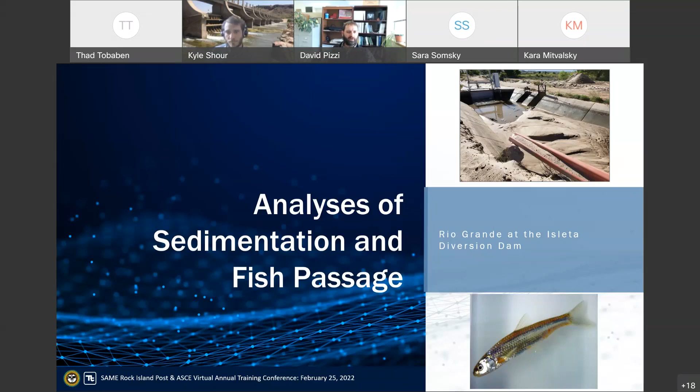My name is David Pizzi. I'm in my 19th year with Tetra Tech, working as a hydraulic engineer. I've been working for the Pueblo of Isleta on the Isleta Diversion Dam, or IDD, settlement for the past 4.5 years, primarily working on solutions to the sedimentation issues and supporting the fish passage solution.

Because of a last-minute meeting with tribal leadership, Derek is unable to join us this afternoon. He was excited to share with you all the project background. In his role as the Water Resources Department Manager for the Pueblo, he is the Pueblo's liaison with the settlement parties, and he is the Pueblo's project manager.

To save you all from having to listen only to me for this whole presentation, my coworker Kyle will be divvying up the topics to share with you. Kyle has been working on sediment transport issues with the Pueblo of Isleta since 2012, most recently with Derek on the sedimentation and fish passage issues at the IDD.

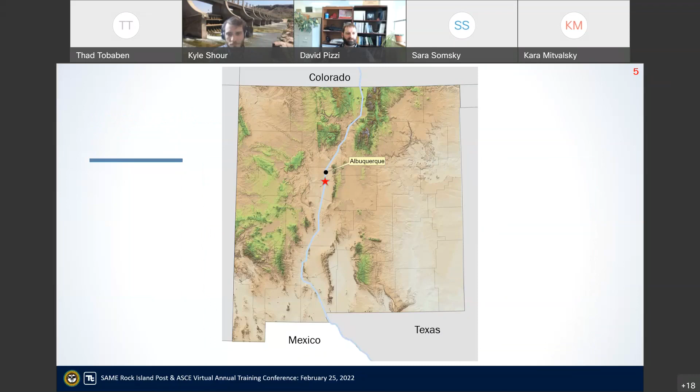In 1923, the New Mexico legislature provided the legal framework for the organization of the Middle Rio Grande Conservancy District. A component of the district's mission is to operate, maintain, and manage irrigation in the Middle Rio Grande Valley in cooperation with other local, state, and federal agencies. So in support of this mission, by 1935, the district had constructed the Isleta Diversion Dam to supply irrigation water to farmlands on both sides of the valley.

Whereas the dam site was originally a constriction that naturally limited potential for sedimentation because flood flows accelerated through the constriction, river narrowing has turned the site into a relative expansion that exacerbates sedimentation.

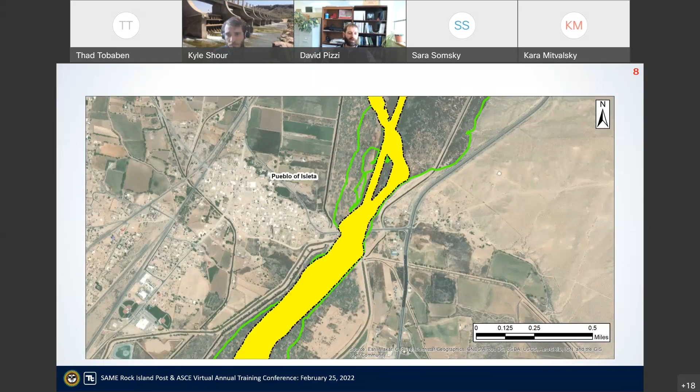The yellow polygon here is the 1962 channel, representing the geomorphic change that occurred over about the first 30 years, the river narrowing after the diversion dam was constructed.

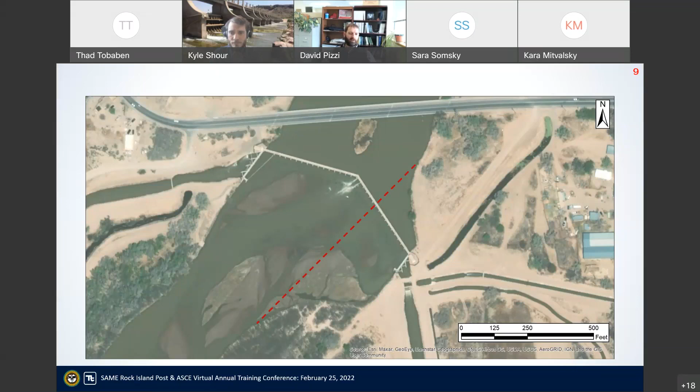It's also notable that the Isleta Diversion Dam diverts flow through sluiceways into irrigation infrastructure on both sides of the Rio Grande. We preliminarily estimated that the cost of a project to narrow the river through the dam site, to better maintain sediment transport continuity, was going to be well in excess of the available funding, largely because of the effort that would be required to relocate a sluiceway and a canal heading.

For some historical perspective, there were disastrous back-to-back floods in 1941 and 1942 that nearly bankrupted the district because of the extensive maintenance backlog from the flooding. So in the Flood Control Act of 1948, Congress authorized the Middle Rio Grande Comprehensive Plan, which transferred ownership of the dam to Reclamation, with the district maintaining responsibilities for operation and maintenance. And the act assigned Reclamation responsibility for rehabilitating the damaged dam.

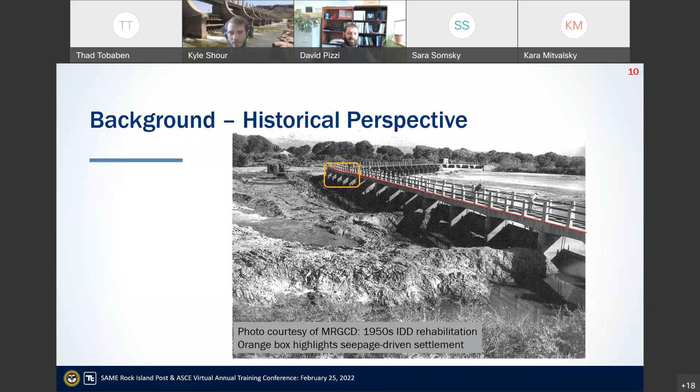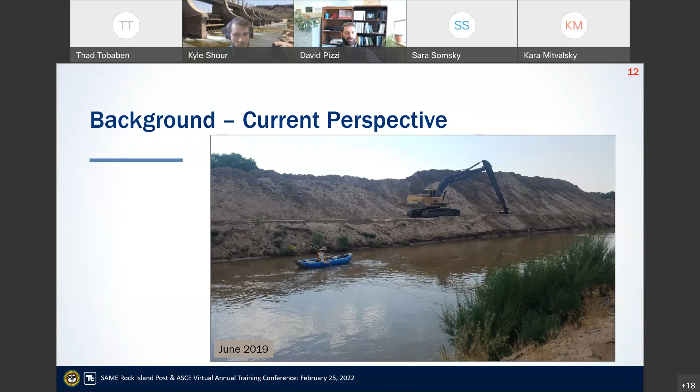So if we come forward to today, or near today, this picture from the summer of 2019 shows extensive dredge spoils along the head of the Peralta Main Canal. They're put there to dewater, and these dredge spoils just confirm that, even today, sedimentation remains a huge operational challenge for the Conservancy District.

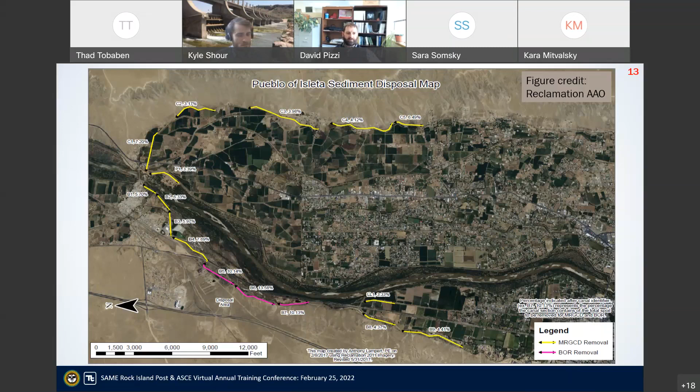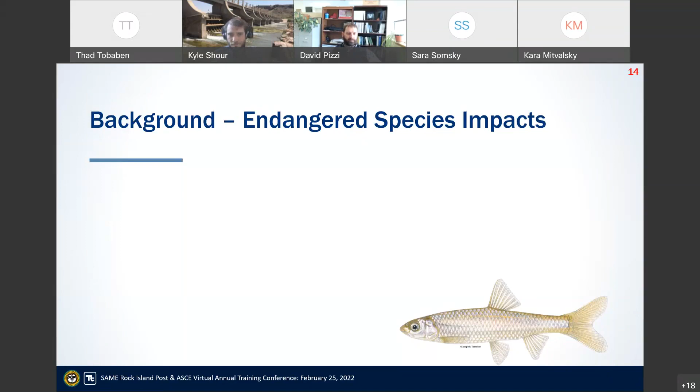In addition to the sedimentation impacts, the operation of the diversion dam has impacted endangered species. In 1994, the Rio Grande silvery minnow was federally listed as endangered under the ESA, in part because diversion dams, such as the Isleta Diversion Dam, fragment their habitat and prevent migration during the summer low flows and river drying.

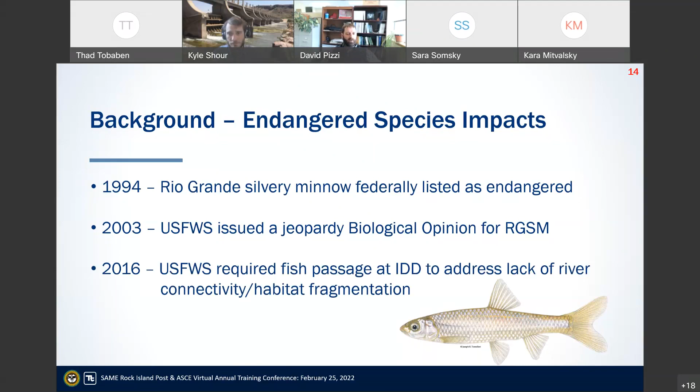So in 2003, the U.S. Fish and Wildlife Service issued a jeopardy biop on the effects of the actions associated with Reclamation's and the district's water operations and river maintenance and the Corps' flood control operations. And it was the 2016 biological opinion where the Fish and Wildlife Service required fish passage be implemented at the diversion dam.

So with this background understanding of the history of the sedimentation and fish passage issues at the Isleta Diversion Dam, how was a settlement agreement reached? Well, the Pueblo contended that it had valid claims against the U.S. and the district in connection with the construction and operation of the Isleta Diversion Dam and the associated irrigation and drainage facilities. Reclamation and the district disputed the validity and the amounts of these claims.

Fortunately, all the parties wished to avoid litigation, so they entered into an agreement of compromise and settlement. And the parties, the Pueblo of Isleta, Reclamation, the Middle Rio Grande Conservancy District, and the Bureau of Indian Affairs, executed the agreement in October of 2016.

Components of the agreement that bear on this presentation include infrastructure improvements, such as projects and activities to minimize the operational problems at the diversion dam associated with sedimentation, improving fish passage at the diversion dam, and restoring bosque, which is just the Spanish word for forested riparian floodplain, the bosque and riverine habitats along the Pueblo of Isleta reach of the Middle Rio Grande.

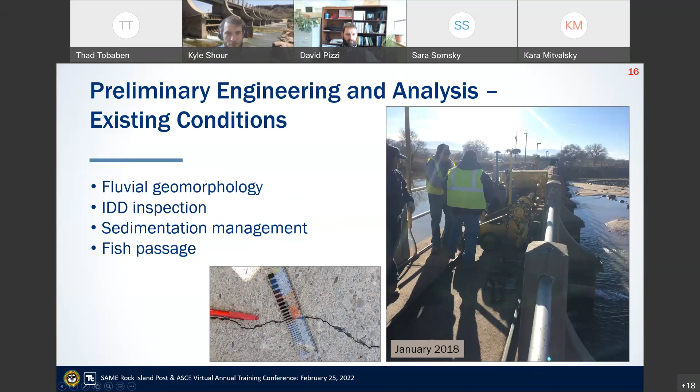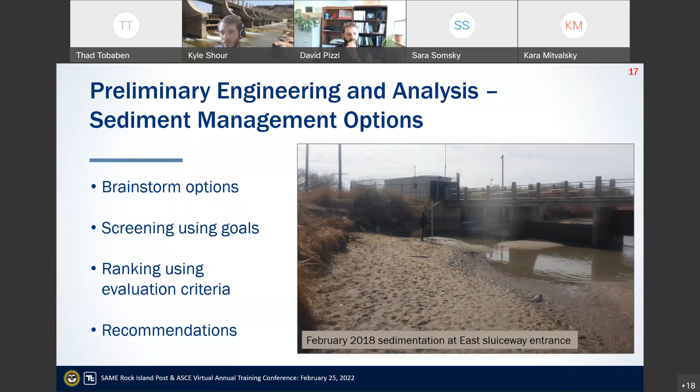Once we had a decent grip on existing conditions to understand the nature of the problems and the capacity of the dam's structural integrity to accommodate different infrastructure improvements, our focus shifted to developing and screening conceptual level options for improving sedimentation management. Working with the technical team, we brainstormed 35 sediment management options, and this is a pretty thorough process. Then we screened the options to remove ones that didn't satisfy all of the goals of the settlement. Remaining options were ranked based on evaluation criteria considering environmental impact, complexity, costs, adaptability, and relative magnitude of sedimentation reduction. We identified knowledge gaps during this process, which were used to make recommendations about additional data collection and modeling so the technical team could select a preferred option from the top ranked options.

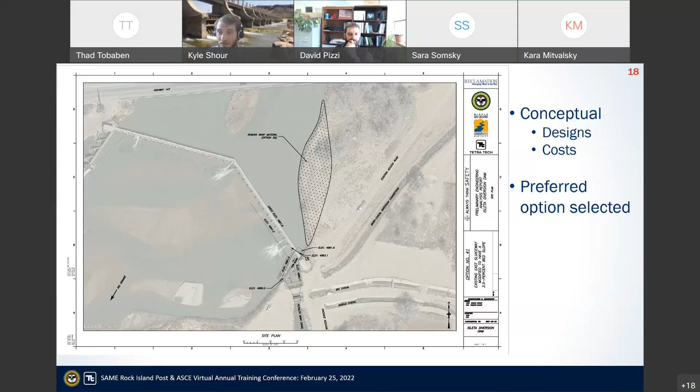We focused on evaluating options that targeted reducing the sedimentation problem on the east side, because that's where the sedimentation was more problematic and impacted reliable delivery of irrigation water. The process included development of conceptual design plans and accompanying cost estimates to help rank the options. Not to give any spoilers, but this ultimately came to the top as the preferred alternative. It involves excavating this bank line and making a sloped bed in this sluiceway. We were really excited that the process proved this option was relatively simple and, as I'll show you, very effective.

Because the 2016 biological opinion required fish passage for the silvery minnow, we also looked into options for providing fish passage. The interesting thing is it's a bit of a unique situation in that there aren't a lot of studies discussing how to pass small-bodied fish. The minnow is 2-3 inches long on average. So like we did with sedimentation management, we worked with the technical team to brainstorm 13 different fish passage options that were screened based on settlement goals and then ranked based on evaluation criteria.

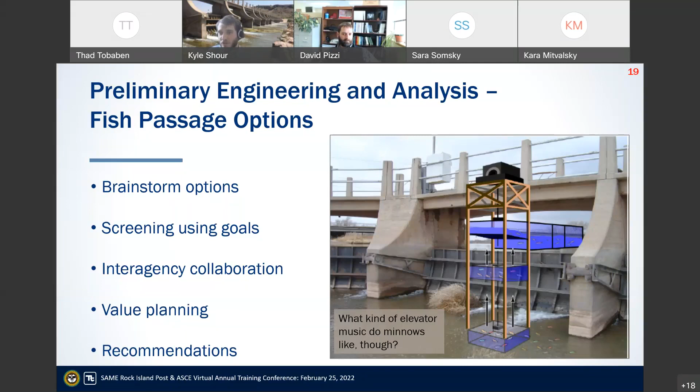In March of 2020, Reclamation led a value planning study of some of the top options, and we found that many of those top options remained tightly clustered in scoring, indicating that other factors, such as the Pueblo's preference to minimize cultural and traditional impacts near the dam, would drive the selection. So we recommended further consultation with the Pueblo.

Ultimately, 2 fish passage options rose to the top. Both fishways go through an existing gate bay in the middle of the dam. One is placed largely upstream and one is placed largely downstream. The downstream fish passage option was quite a bit less expensive to construct because you're not trying to protect a concrete apron that went in as part of the 1950s rehabilitation to prevent piping underneath the dam. However, there is an important cultural site that is regularly used by the Pueblo downstream of the dam, and so there was a lot of concern about whether that would impact their use of the site.

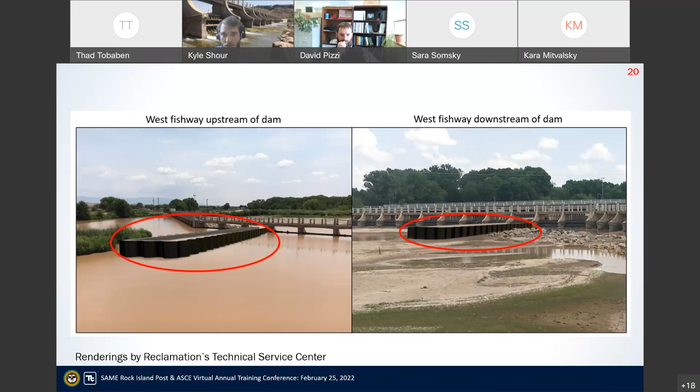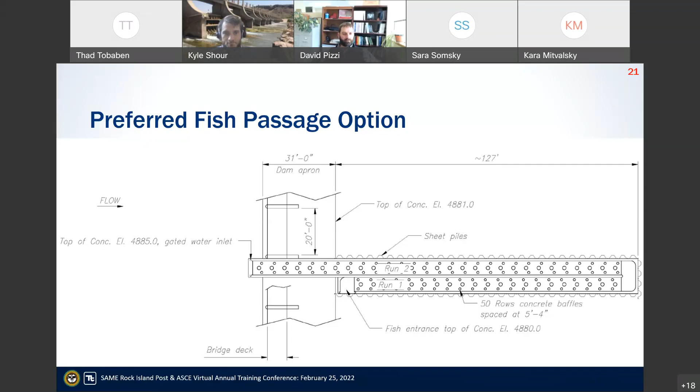We evaluated existing environmental permitting authorities that might apply for the implementation of sedimentation and fish passage improvements, particularly considering anticipated environmental compliance needs such as NEPA, ESA, Clean Water Act, and cultural compliance. We also compiled compliance documents from the Pueblo completed in the last 15 years to provide background information that may be used as reference for environmental compliance required for construction of the preferred options. We completed these tasks in close coordination with the technical team.

One of the important findings of the preliminary engineering and analyses was that sediment management options could not be effectively ranked because of a lack of understanding of sediment transport processes near the Isleta Diversion Dam.

We recommended additional research by asking the following four questions. First, why is sedimentation on the east side canals more problematic than the west side canals, despite the fact that they divert comparable flows?

Second, whether sediment diverted into the irrigation canals enters the sluiceway from near the bottom of the sluiceway or higher in the sluiceway water column. Some options are better suited to remove bed load, which stays near the bottom of the water column, while others are better suited to remove the suspended load that can move much higher in the water column. The answer to this question was instrumental in selecting a preferred option.

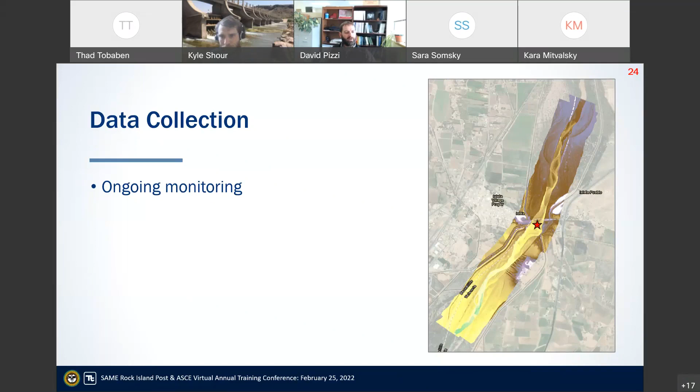So since 2015, just like Kyle was saying, we have been monitoring a channel restoration project immediately downstream of the dam. And the monitoring includes cross-section surveys, vegetation inventory, and listed species surveys.

So in 2017, for the Bureau's Albuquerque Area Office, we surveyed the bathymetry using RTK GPS and the floodplain topography using LiDAR for a mile upstream and downstream of the dam. The resulting surface is shown here at right.

And the preliminary engineering recognized the value in building on these previous monitoring efforts to focus on future measurements of hydraulics and sediment transport into the sluiceways.

So the district started recording gate operations and gate settings for the main stem dam radial gates, the sluiceway gates, and the canal headworks during the 2019 irrigation season.

And the spring runoff for 2019 was projected to have a high peak flow and a sustained duration, two conditions that are ideal for mobilizing and transporting sediment. So the technical team agreed to prioritize that opportunity to measure hydraulics and sediment transport.

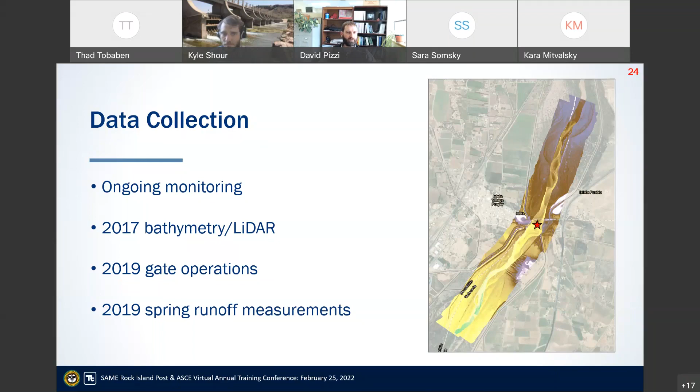And we were able to leverage a relationship with the USGS's New Mexico Water Science Center to accurately and economically complete all of the laboratory analyses of sediment masses, concentrations, and gradations.

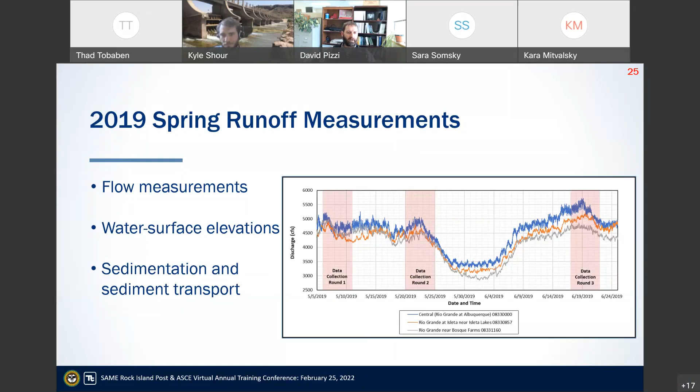So this figure shows the 14 agreed upon locations where we collected hydrographic measurements during the 2019 spring runoff. You can see that there's a location upstream, a couple locations upstream of the dam on the river, one downstream. There's the inlet and outlet of each of the two sluiceways, and then measurement locations in the canals heading at the dam.

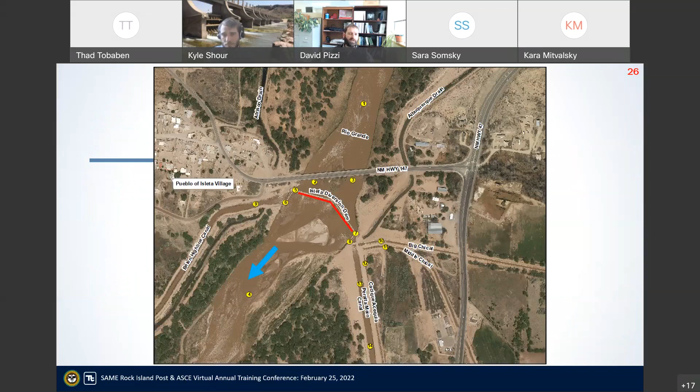So we used our acoustic Doppler current profiler, ADCP, mounted in a kayak to measure flow in the Peralta main canal. And we also mounted it in a trimaran so that we could measure flow in the sluiceways.

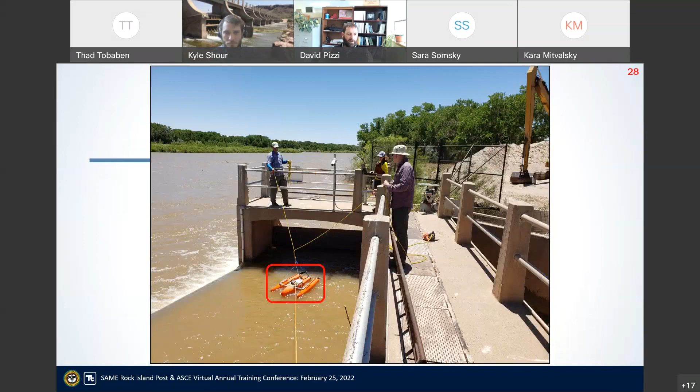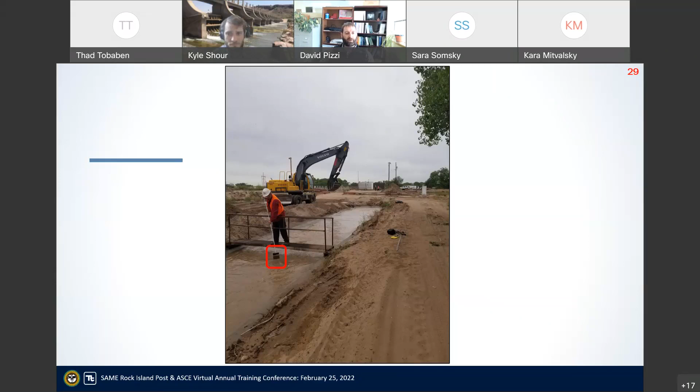These were places where we didn't have good information on flow rates. We also collected bed material samples from the canals and from the river. Here you can see there was active dredging that we were working around, so we had to coordinate closely with the irrigation district to ensure the safety of our personnel and theirs.

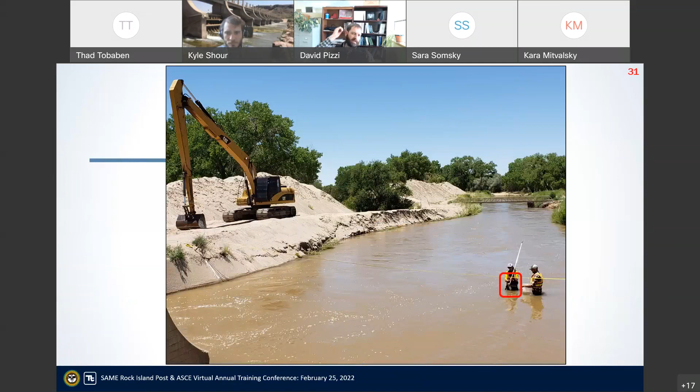We wound up collecting quite an extensive set, or 3 sets, of measurements. It was the interpretation of these measurements that really crystallized for us a eureka moment in understanding why the east side sedimentation issues have been historically so much more problematic than on the west side. It's largely the turbulence in the east sluiceway.

It's that understanding we gained from this effort that really guided the development of the structural modifications we were considering for the East Sluiceway. These modifications were evaluated using a physical model. I will share with you our involvement in the testing and analyses with that model, but I'm going to turn it over to Kyle next to talk a little bit about some of the numerical modeling we completed.

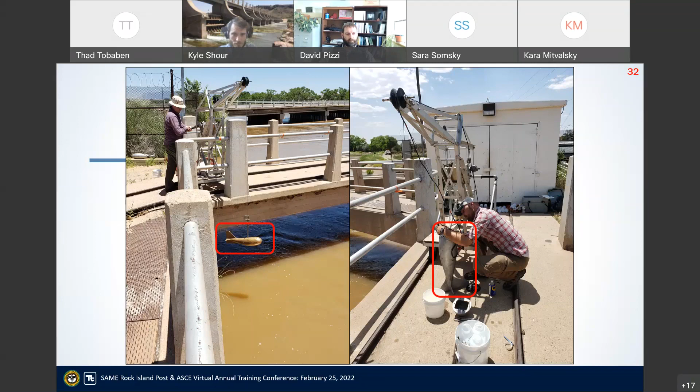So we completed 2 types of numerical modeling for this study. Both were sediment transport analyses - one was a 1D model, and the other was a 2D model. The 1D modeling was used to estimate the supply of sediment to the Isleta Diversion Dam from further upriver. The 2D modeling was used to assess the impacts of a range of different gate operational scenarios on sediment diverted into the sluiceways.

The 1D mobile bed model was previously developed using HEC-RAS for the Albuquerque district. We completed this model in 2008 after a period of collaboration and beta testing with Stanford Gibson at HEC. The 2D model was developed for this project specifically using SRH2D. This afforded us a good opportunity to work with SRH2D developer Yong Lai, who sits at the Denver Technical Service Center, which is represented on the technical team.

Yong Lai is now beta testing functionality to route sediment through radial gates like we have at the Isleta Diversion Dam.

The USGS Gauge at Central Avenue in Albuquerque on the Rio Grande has a robust long-term record of suspended sediment transport measurements. We use this record to develop a record of total bed material load, which is the bed load plus the sand size fraction that's suspended, using the Bureau of Reclamation's modified Einstein procedure. The software package is called BORA-MEP.

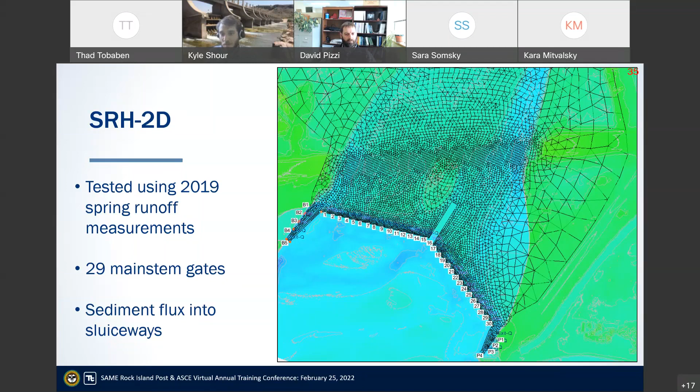Then the number and location of open gates were varied to evaluate how those changes impact changes in bed material flux into the sluiceway. This process is ongoing and will eventually be completed for a range of flows and operational scenarios. But this is an example of the results that we're getting out of the SRH2D model.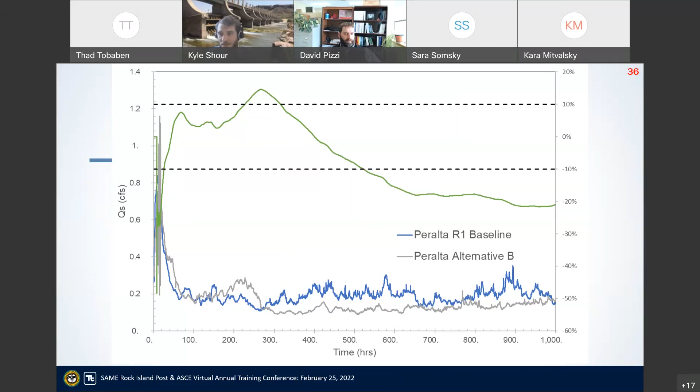So what we realized was that with the turbulence, the numerical modeling software for the sluiceways, even CFD software, was not yet reliable enough for accurately representing the sediment dynamics that we needed to quantify.

So the turbulence was clearly the primary driver behind the technical team's choice to proceed with a scaled mobile bed physical model that was ultimately designed, constructed, and operated at Reclamation's hydraulics laboratory at the Technical Service Center here in Denver, Colorado. This location was relatively close to the project site.

Pre-COVID, we thought this was going to be the ideal way to allow stakeholders to frequently visit the model. Our design started in early 2020, and construction of the model began in July 2020. So most of the simulations were carried out during COVID, which really impaired the ability to have stakeholders come up and visit the model.

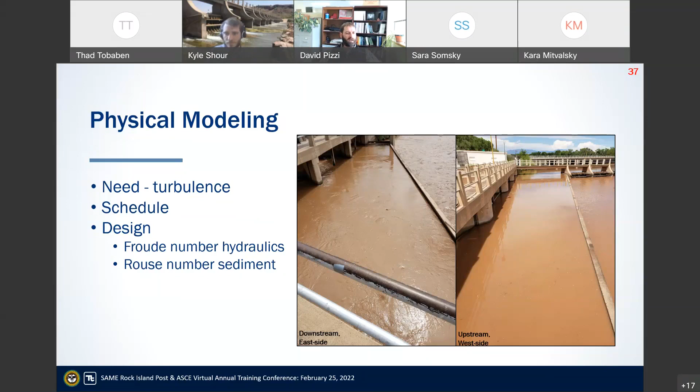The red outline here shows the footprint of the 1 to 8 scale physical model. Because flow depths are relatively shallow given how wide the river is, it was important to have a large scale model to keep Reynolds numbers up. The 1 to 8 scale is relatively large, but it meant we could only get 10 of the 30 main stem dam gates within the model.

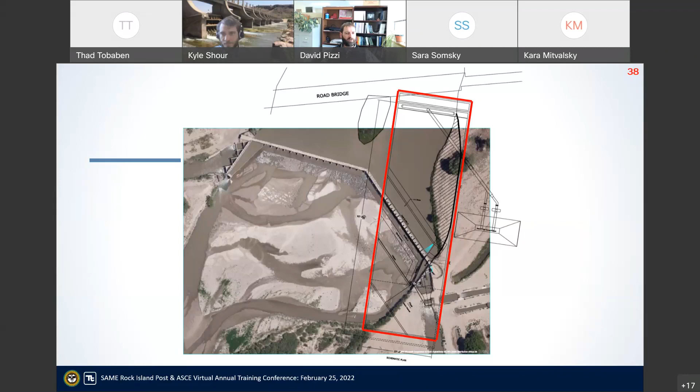Just note the angled orientation of the dam here. Now we're looking facing upstream in what we call the bathtub in Reclamation's lab. The green foam here is the base of the diversion dam, and the bathtub is roughly 30 feet by 100 feet long.

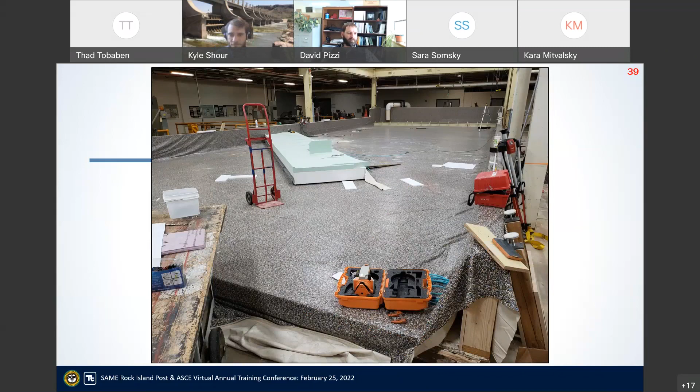Reclamation used 3D printers to fabricate some of the geometrically complex parts of the model, such as the main stem dam radial gates shown here.

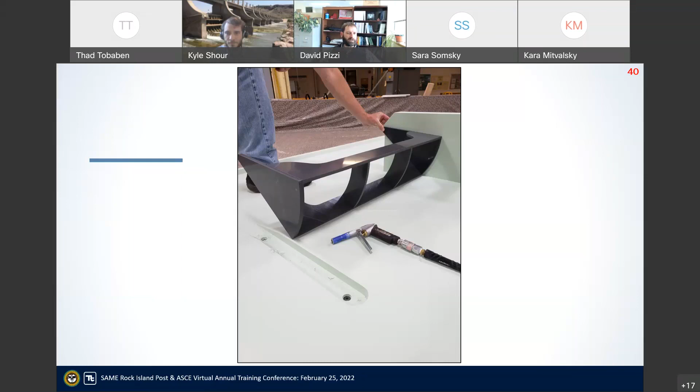Two large pumps were used to recirculate water and sediment. The gray roll-off dumpster at right was set into the sump to keep the recirculated sediment from mixing with the rest of the laboratory's water supply.

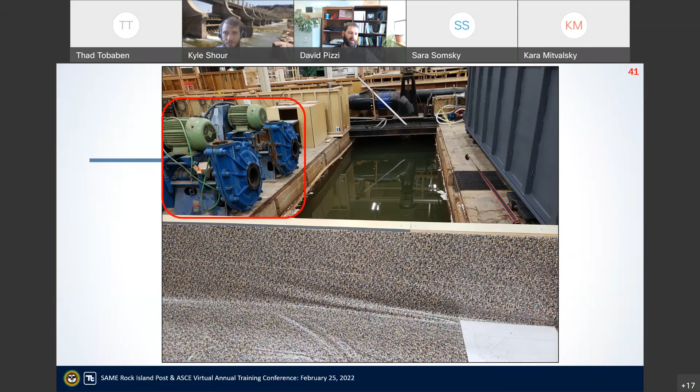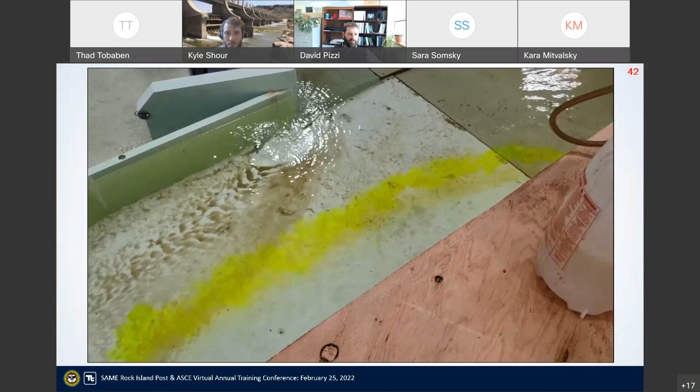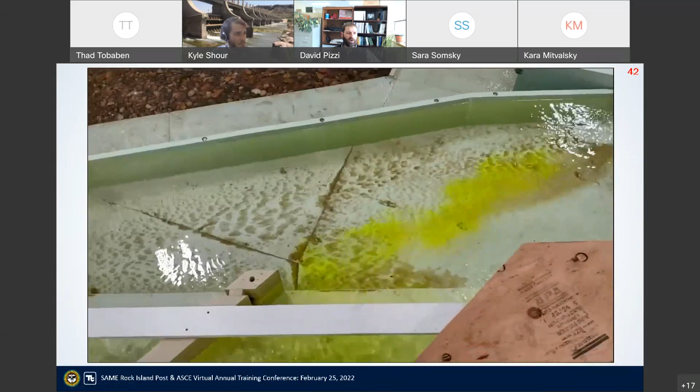Hopefully we got a video or two here that work well enough for you. We used dye for the hydraulic testing before sediment was added to the model, and this was a really important step to make sure that we were able to observe in the model some of the vortices and turbulence that we observed at field scale.

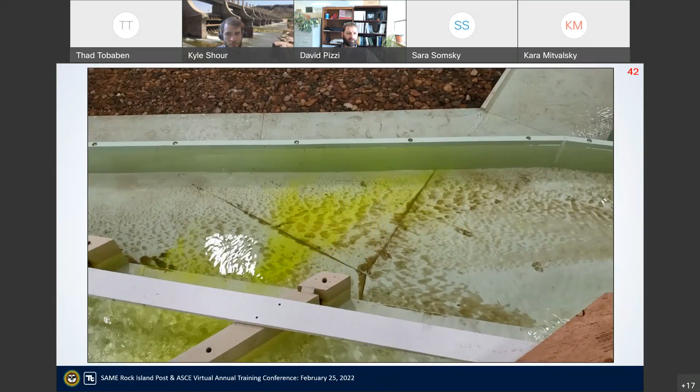Fracking sand was used for the scaled sediment gradation, and the storage of sand in the bed of the model was the source of sediment supply for each test.

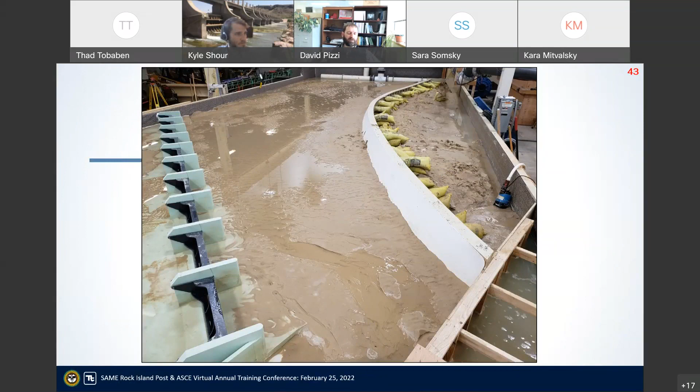We compared depositional patterns in the model to observations. Here we are facing downstream into the East Side Canal headworks across the East Sluiceway, and the depositional patterns in the sluiceway closely aligned with our observations, which increased our confidence in the model's ability.

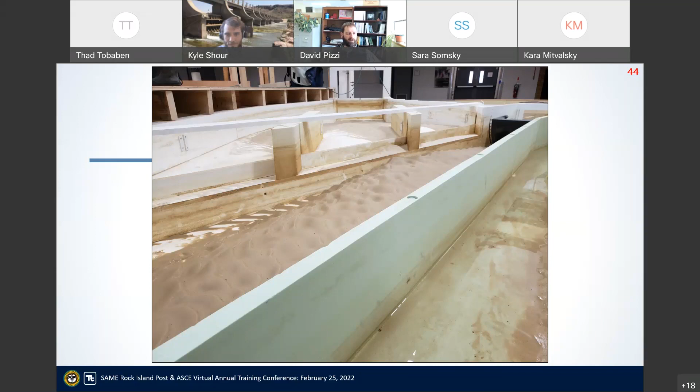Reclamation created mixing boxes that allowed all of the sediment in transport to be measured continuously.

This was done using acoustic backscatter sensors wired into a laptop, along with sensors of water levels and flow rates. The laptop converted all of the scaled measurements to field scale values, which was great for stakeholders so they could relate the numbers they were seeing in the model to their real world experiences.

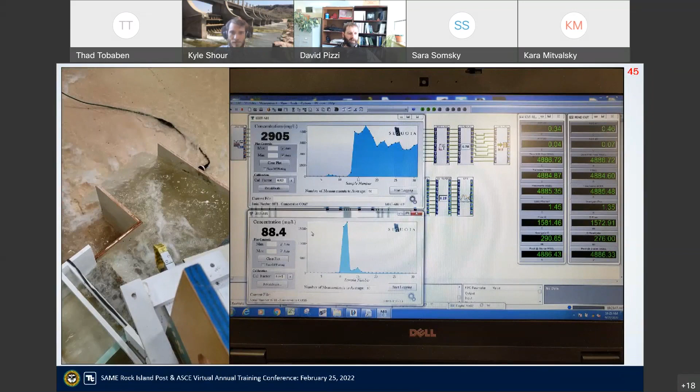The modular nature of the model facilitated testing many potential modifications. Here we tested a lengthened sluiceway inlet to see if we could move turbulence away from the canal headworks.

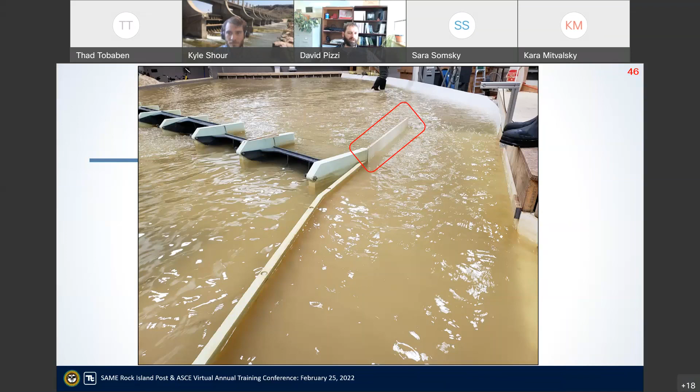In this picture, you see a widened sluiceway inlet, and this configuration actually required removal of one of the main stem radial gates and a pier.

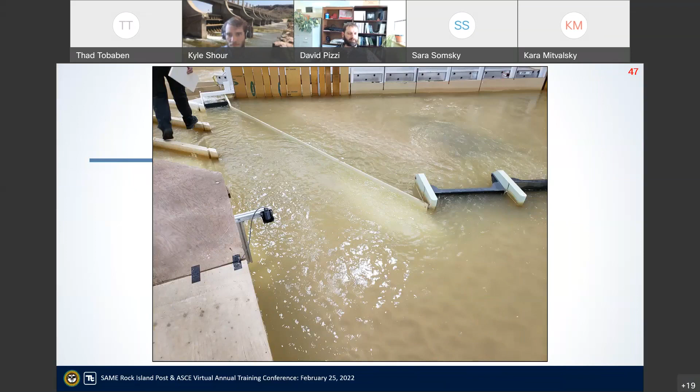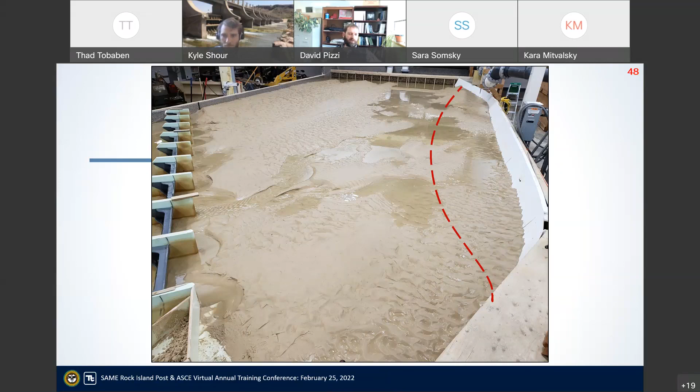In this figure, the red dashed line indicates the alignment of the existing bank of the river. You can see here that the realigned bank better aligns flow approaching the sluiceway with its orientation, and eliminating some of those bends in the flow substantially reduced turbulence and canal sedimentation.

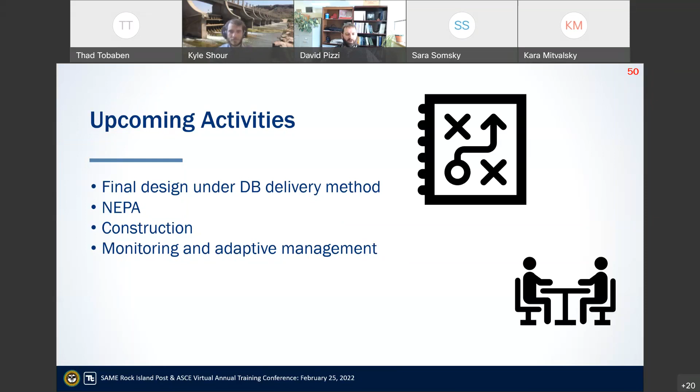I'm going to now hand this back to Kyle so he can share with you the final component of the settlement agreement we are currently pursuing, the bosque and riverine restoration.

So the purpose of the Bosque and Riverine Restoration and Implementation Plan is to support the settlement agreement by providing scientifically based recommendations. It's consistent with the Pueblo's cultural and natural resources goals for enhancing, rehabilitating, and if possible, restoring floodplain and riverine habitat along the Rio Grande through the Pueblo.

We developed the plan's goals based on the Pueblo's goals conveyed during a series of meetings with traditional cultural leaders, tribal elders, the tribal council, the tribal governor's office, various tribal departments including natural resources, water resources, and public services, and open meetings with tribal community members.

The key restoration goals resulting from these meetings included reducing wildfire risks in the bosque, protecting and enhancing wildlife habitat quality and diversity, and improving river floodplain connectivity. The Natural Resources Department staff reviewed these goals and identified a variety of different management actions that could be taken to achieve each one.

The goals and the management actions were integrated. Actions integrate ecosystem function and processes to benefit both terrestrial and aquatic organisms. And I think that last part is important. The Pueblo members and even leadership were not too concerned with the silvery minnows and yellow-billed cuckoos.

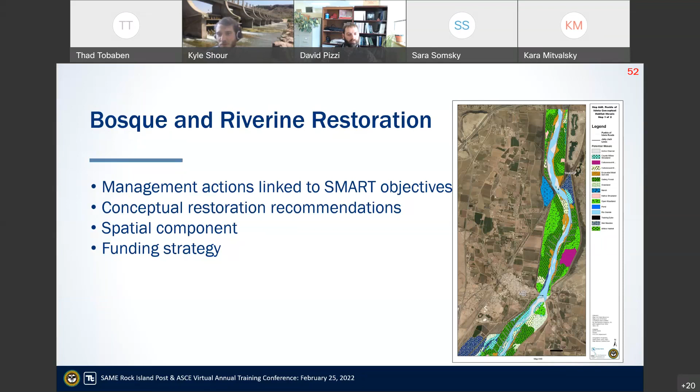The implementation strategy will be phased out over the next 10 years to achieve every one of these objectives. We prepared a planning level cost estimate of about $11.5 million to implement everything. That exceeds the funding that is available for bosque and riverine restoration in the settlement. So comprehensive long-term funding strategies will need to be developed. We should consider how to leverage existing settlement funds to secure additional or matching funds.

With that, thank you to everyone for the opportunity to present. We hope you are interested in hearing about the technical challenges as well as the collaborative work with the multi-agency team.

To develop solutions for restoration, fish passage, and sedimentation. And with that, we have a few minutes and we'll happily stand for questions and comments.

Great job. Thank you very much.

One of the things, and I might have not caught it well, but you had mentioned that the Pueblo tribe wasn't necessarily interested in the silverfish. They're more worried about unsightly, invasive plants. I don't know that those were your exact words, but is that generally the opposite of how you find or would see that situation go, or?

Well, each tribe, each Pueblo tribe in New Mexico has their own unique leadership and governing style, and so their concerns will be different. I think there's maybe a sense of, we didn't do anything to the silvery minnow, or before the flow regulation went in, the river would go dry every year, and the silvery minnow did fine. And so there's that sense because they've been there on the Rio Grande for thousands of years.